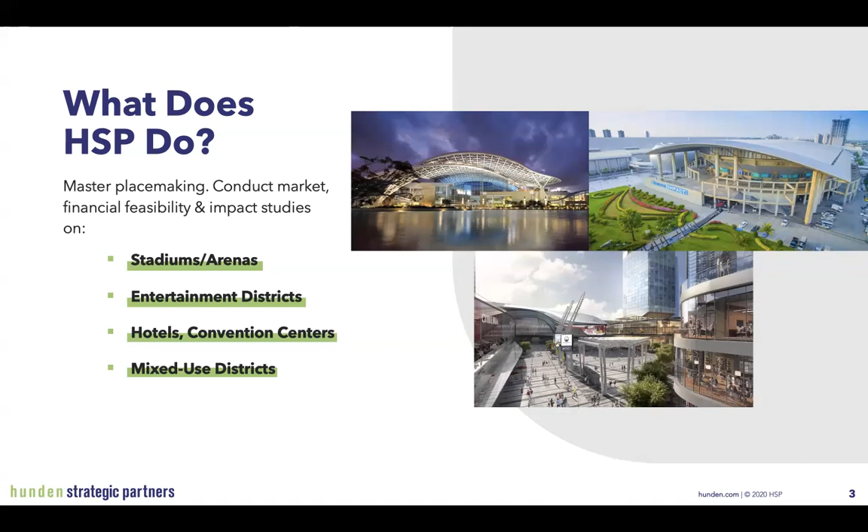That's why we are super excited to be here talking with you today, at least virtually. So welcome to ALSD International. This is our second year doing this. I presented back in Dublin in 2019, and that was great fun.

Right now we've got more than 10 billion euros in international sports projects currently finishing or underway, and 6 billion in just the last 3 years. Featured in this year's presentation: the updated venue database, new builds and major renovation profiles, entertainment districts, FIFA World Cup facilities, esports, and private equity investment. There's more than we have time for, so I have to move quickly.

First off, the International Venues Database. This is our international database, non-North America. We have one for North America because we've been presenting at ALSD North America for the last 5 years, but now we have the international database too. It includes 400 stadiums and more than 120 arenas worldwide. For purposes of a cutoff, we have minimums of size: football stadiums 50,000 plus, same with rugby, cricket 35,000 plus, Formula One gets a pass.

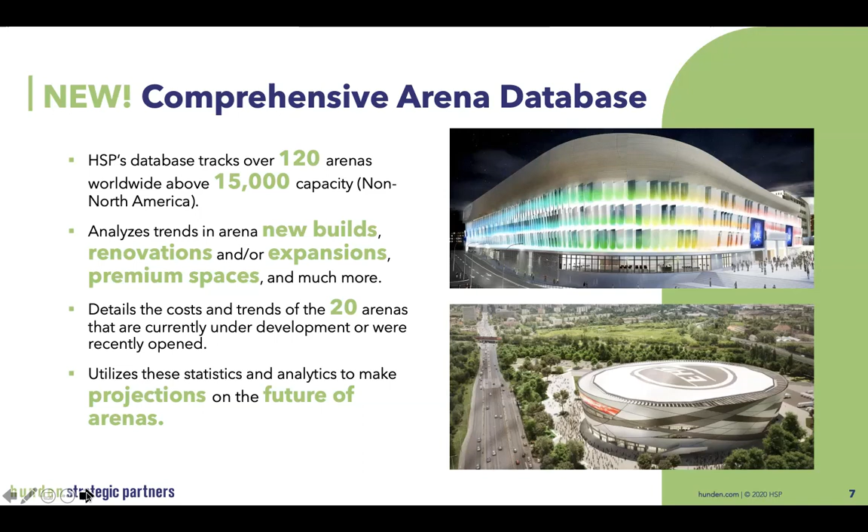Our arenas database is at 15,000 plus around the world. This comprehensive arena database covers 120 arenas worldwide above 15,000 capacity, and analyzes trends in new builds, renovations, expansions, and premium spaces, and more. We really focus on what's new and changing and what trends are happening, so this allows us to help make projections for the future.

So the pace of new projects is already strong into the 2020s. We're just into this pandemic decade, and already we've got 20 stadiums and 10 arenas either opened or in process around the world, not including North America.

Spending on new venues continues to grow, even though the number of new venues bounces around from year to year. There's an overall trend of more, led by football. And of course we show cricket, rugby, and Formula One here. We don't show spending on arenas because this one is focused mostly on sports venues. Right now we've got an average of roughly 750 million euros spent per year on new venues, with most of that going to football venues.

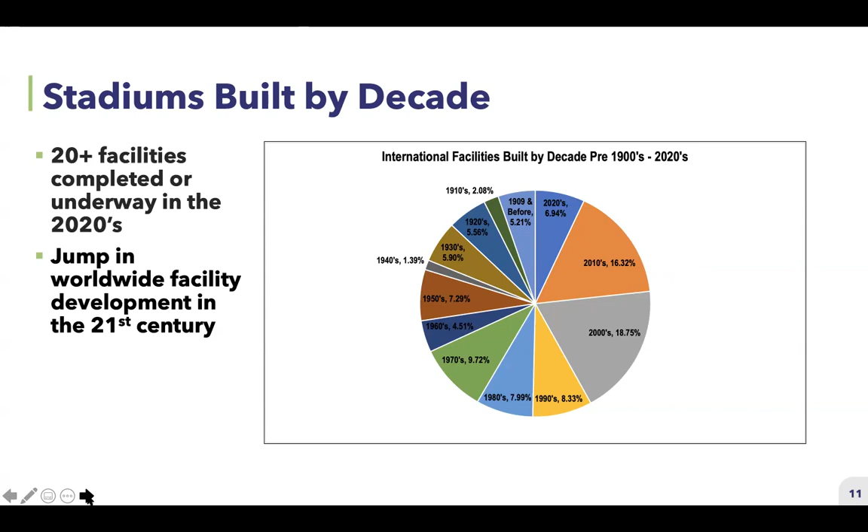Stadiums built by decade: we've got 20 plus facilities completed or underway in the 2020s, as I mentioned up front. Since 2000, about 45% plus of venues active right now have been built in the past 20 years. So that's pretty impressive, a lot of growth happening.

Arenas built by decade: we have 11 arenas completed or underway in the 2020s just so far.

Football builds are driving market growth. As you can see here, we've got 9 opening in 2022, 3 this year, 9 next year, and then a continuation through 2025. So that's very exciting, and more on the way.

Arenas by continent: North America still leads, Asia with 38, 54 in Europe, but the arena growth really continues to expand. This is something that has not been as much of a focus because of the different kinds of sports that are really in focus. But as for entertainment, arenas are really becoming a big deal more and more around the world, not just in North America where basketball and hockey are popular.

In terms of new builds, international football stadium new builds for the next 5 years, we've got the San Siro Stadium, which has yet to be chosen which design they're going to go with, but after the mayoral election coming up, they will make a decision, and the stadium will be open for the 2026 Winter Olympics and will likely be the opening ceremonies site. It will also play host to AC Milan and Inter Milan. That is a huge cost there, 1.2 billion.

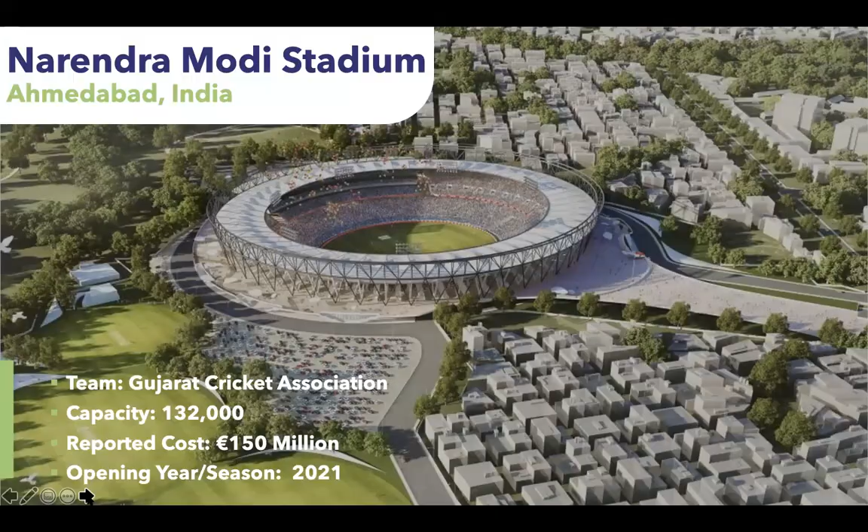International Cricket Stadium new builds. Now, this is actually a renovation of the 132,000 capacity Modi Stadium in India, absolutely massive and underway right now.

Then international entertainment arenas, new builds. We have the Etihad Arena in Abu Dhabi, capacity 18,000, part of the $2.8 billion project there that we'll be showing you about here in a minute. Co-op Live Arena in Manchester, England, capacity 23,500. That's absolutely huge for an indoor arena, 350 million euros there, opening year 2023.

Speaking of Euros, Live Arena in Tampere, Finland, capacity 15,000. Not a huge arena, but very cool looking. Reported cost 124 million euros, opening year December of 2021. Others that we are keeping an eye on because they're fascinating: the Sydney Football Stadium in Australia, the stadium in Athens, Greece, the Agia Sophia Stadium, the 55 million euro Stadio Cagliari in Italy, and the Barracuda Bay Stadium in China.

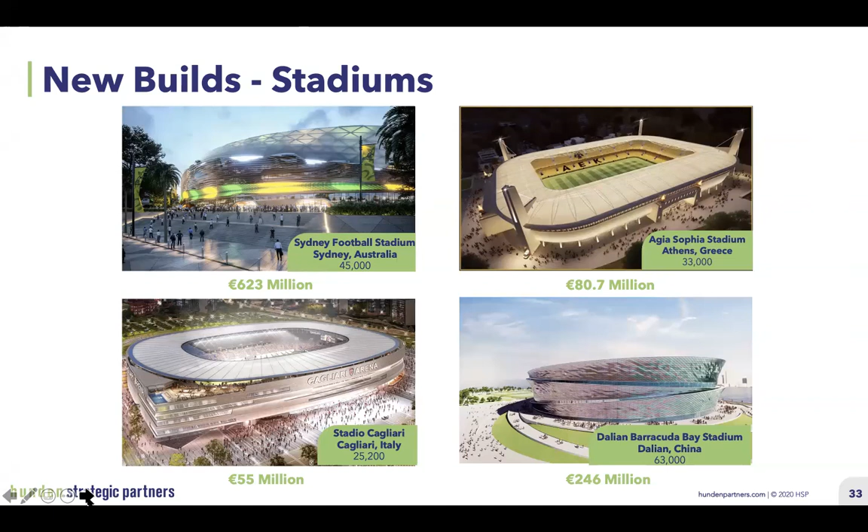So now let's turn to the FIFA World Cup.

Here, of course, we've got Qatar, the smallest country ever to host the FIFA World Cup, and they've got 8 different facilities underway. So we've got a lot of venues here. We have the Lusail Iconic Stadium in Qatar. Well, all of these, of course, are in Qatar. The Al Bayt Stadium, the Al Janoub Stadium, and the Ahmed bin Ali Stadium. So all of these range in size, and also they all range in future use. They will all be changed, most of them, for different future purposes.

We don't have time to go into all of that, but we've got tons of research on this, and it's really fascinating what they're planning to do. We also have these four here, the Education City Stadium, and many more, most of them in the 40 to 50,000 capacity range. But as you can see in the prior slide, we have the Lusail Iconic Stadium at 80,000 capacity.

World Cup locations in 2026. This is the first time that more than two nations have combined to host the World Cup, and all of the venues are already built. There are enough existing venues in North America, which will share this prize, to not have to build any new venues, similar to the Olympics. It's a lot of pressure to put on one country to host all these, but luckily the United States, Canada, and Mexico have enough facilities to do this already.

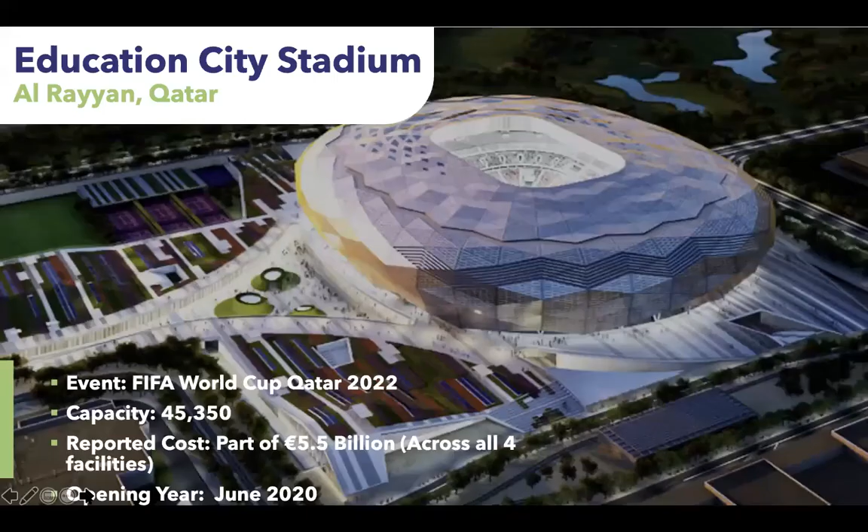Let's talk about Education City Stadium in Qatar. This is part of a 5.5 billion euro project across all four facilities that it will be a part of. It is absolutely massive. And then, of course, the really big one is the Lusail Iconic Stadium, as we talked about before. And then we have this Al Tumama Stadium here. All of these look super cool. And then here's the one that we're really going to focus on.

There's this idea that, why would you build all these stadiums for one-time use? We had that thought with the Olympics—when the Olympics leave, like in Brazil, a lot of these stadiums and facilities fall apart. Same with the World Cup. What happens to all these facilities? Do they still keep getting used, or is there a future use for them? So in this one, it's designed to be completely disassembled in the future. We're going to show that to you right now.

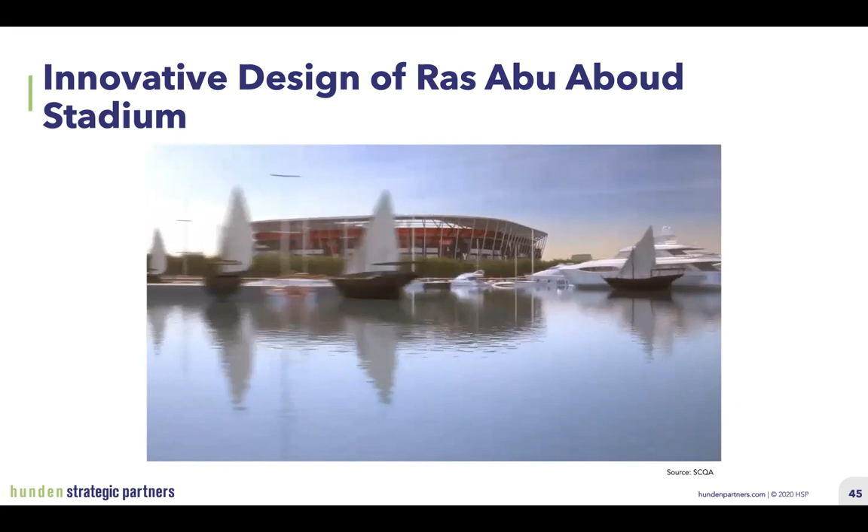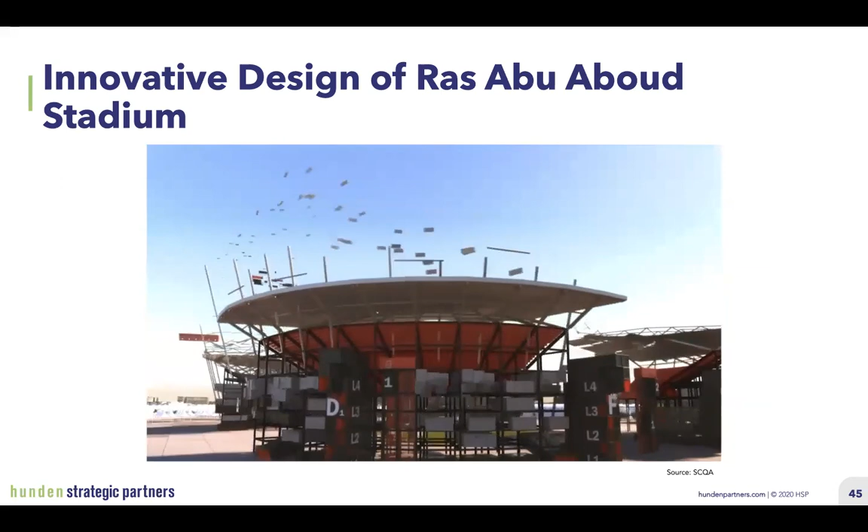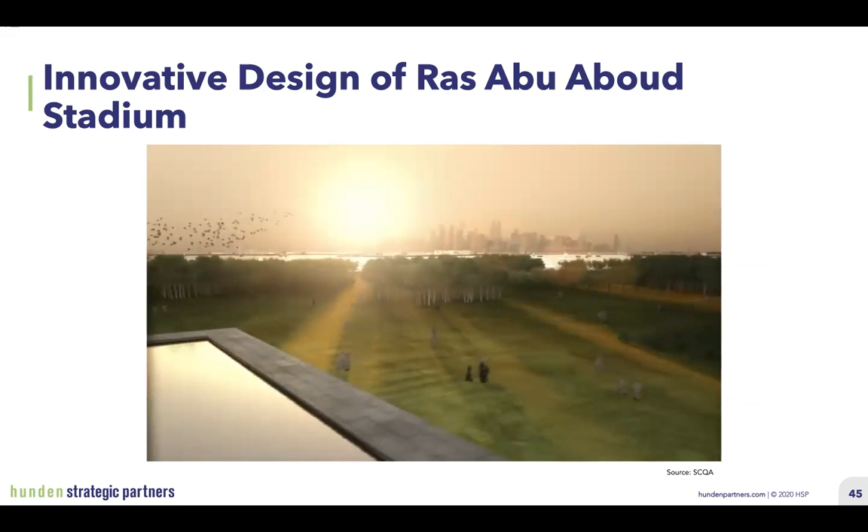The shipping containers are used to help create other venues in other places afterwards. As this gets disassembled, other smaller venues get assembled in different places using those same shipping containers and all the materials they can hold. That's the idea behind the Ras Abu Aboud Stadium.

Now, how about the FIFA Women's World Cup? Bidding nations Australia and New Zealand, 2023—they are hosting, and we have many venues here, including the opening ceremonies at Eden Park in Auckland, New Zealand, where the All Blacks play. We have other stadiums shown here, some really glorious stadiums in Australia and New Zealand for these facilities, including Stadium Australia, the Sydney Football Stadium, Moore Park, the GABA, and Hindmarsh Stadium in Adelaide, plus two more in Perth and Melbourne. It's just going to be an absolute great time.

World Cup Stadium redevelopment: here we have the Sydney Football Stadium in Moore Park, Sydney, Australia, 45,000 capacity, part of a 700 million dollar or euro project.

And now we're going to move from major sports venues to esports venues. The explosion of esports—we've got this absolutely exploding. A lot of people don't consider it a sport because people don't move around a lot, but they are. This is a very popular thing, and virtually things are moving around, and the growth in viewership is astounding. China is now limiting how much time youth can spend playing video games. It's interesting—I'm not sure they'll restrict adults, because adults are often the ones playing video games the most, not just kids. But anyway, it's certainly the wave of the future, expected to grow at a 9% annual growth rate or more. In 2019, there were almost 500 million viewers, and total investments have grown tenfold in just the last three years.

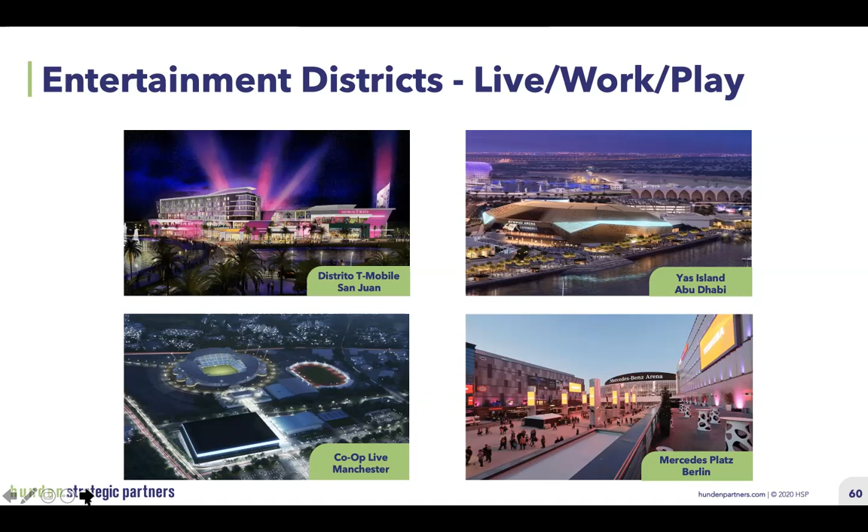One of the ones we worked on is the T-Mobile district in San Juan, Puerto Rico. We're going to show you a little bit about Yas Island in Abu Dhabi. We have the Co-op Live in Manchester, and of course Mercedes-Benz Platz, which has been around for a while in Berlin, and it's fantastic.

We've talked to you about the San Siro district. This is part of a much bigger district that's going to be hosting the two teams there, AC Milan and Inter Milan, and will host the 2026 Winter Games.

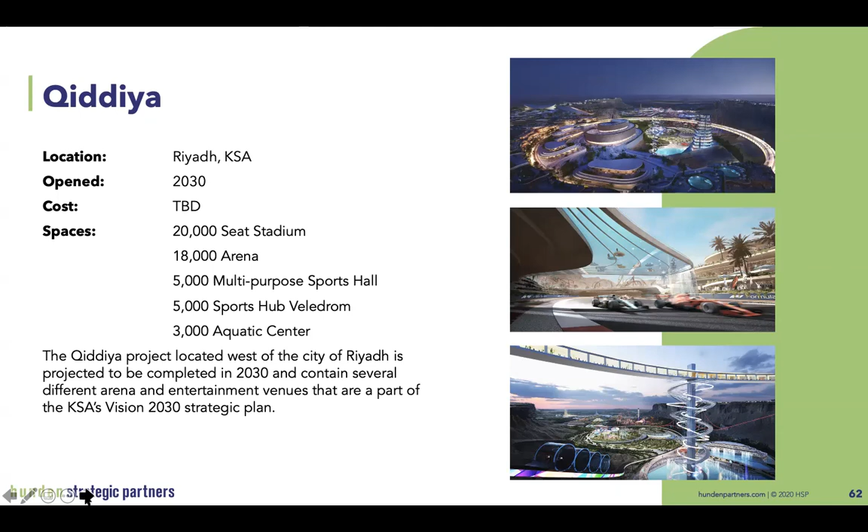And then we have Qiddiya in Riyadh, KSA, proposed to open in 2030. It will have multiple sports facilities and be part of a much, much larger entertainment district planned for that capital city, as they become more westernized, opening up to tourism and seeing its benefits.

Let's take a look at the Yas Island project, which is 55% completed and has already been host to some huge events.

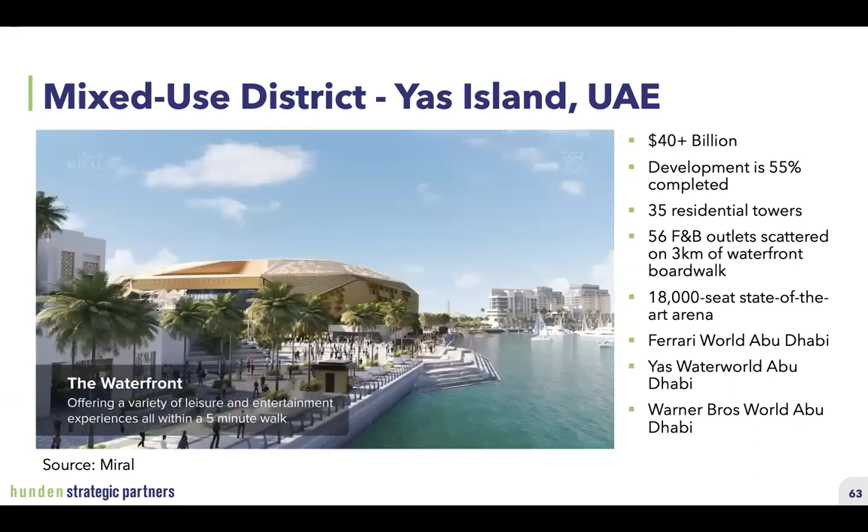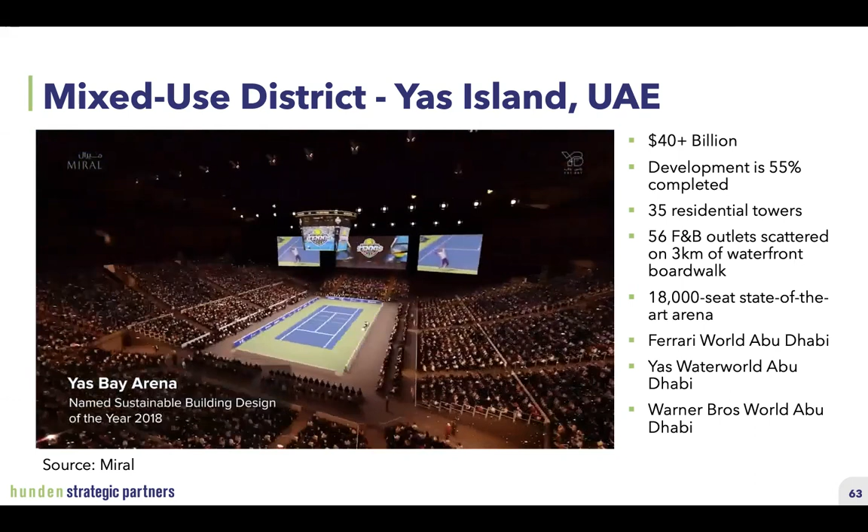Now, one of the features we wanted to get to toward the end is this rise of entertainment districts all around the world, and how these really help create an atmosphere before and after events, especially games, both in the United States and all over the world.

Like we just saw in Abu Dhabi with Yas Island, these stadiums are often uber expensive and really can't be afforded without some other support. So it makes the most sense to have that support come from commercial development around it. If a district can recapture revenues from that commercial development to help fund the stadium or arena, that works out well. That's been happening across mostly North America, but in other parts of the world too, for a while now.

This is one of the things our practice focuses on. The Deer District in Milwaukee got a lot of press because of the Bucks not only winning the playoffs but also the NBA finals.